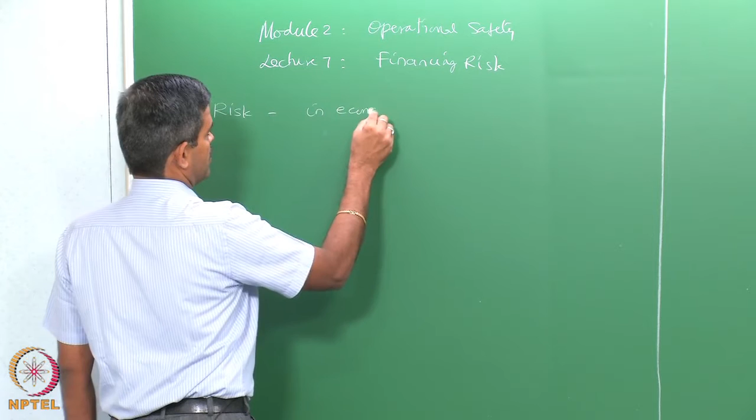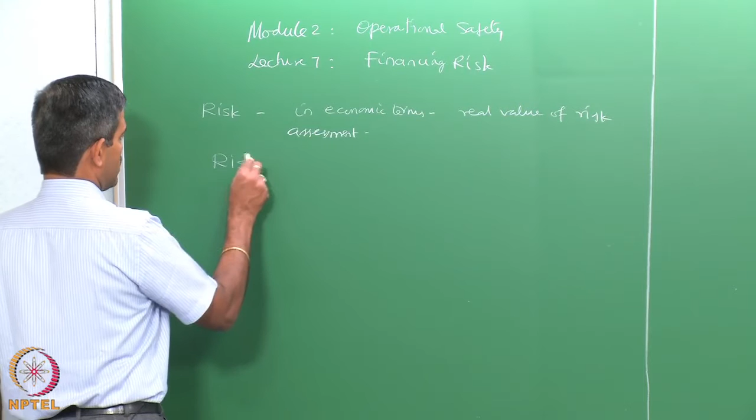Recollecting slightly from previous lectures: risk should be associated in economic terms to get the real meaning or value of risk. So, to get the real value of risk assessment, it is essential that risk be connected to economic terms. Therefore, it becomes important to quantify risk. So, risk need to be quantified.

One can use statistical tools to estimate probable risk analysis, but that is not effective because they do not address the economic issues behind the real value of risk assessment. So risk needs to be quantified. We agree that risk estimates are attractive

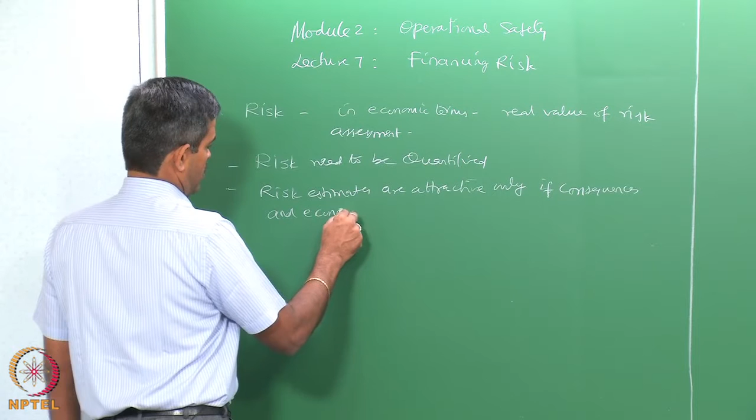only if consequences and economic perspective are also addressed in the analysis. So we can make a statement like this to make risk analysis or risk estimates more attractive.

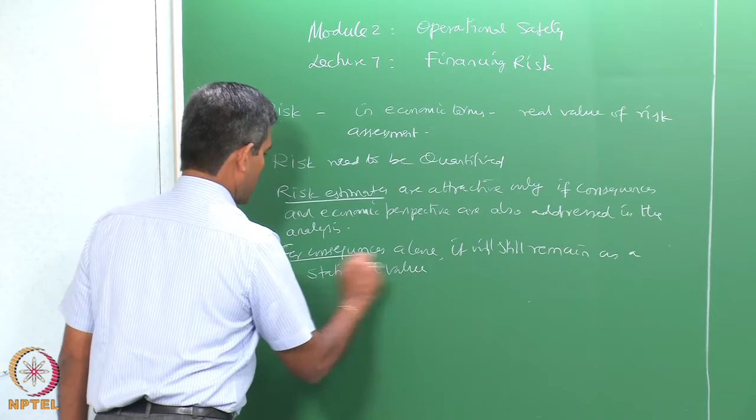But if you look at the consequences alone, you can understand that it will still remain as a statistical number. We will not be able to get back the original value of risk assessment if we do not attach economic consequences or economic importance to the risk analysis.

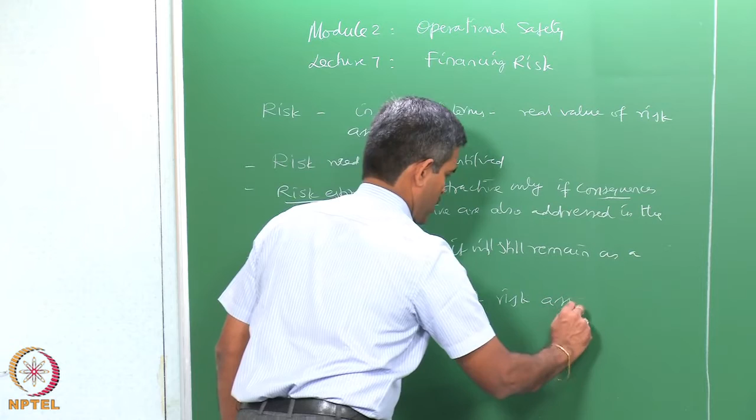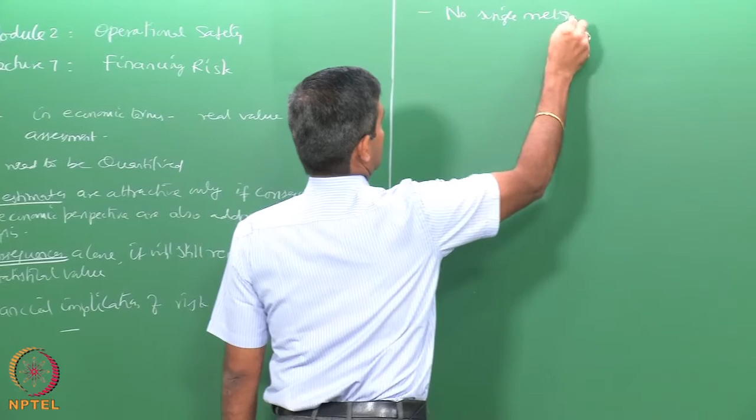So one is now interested to know what methods can address economic loss or estimate the loss - one is interested in the financial implication of risk assessment, because it should be reflected in the company's balance sheet for risk estimates and so on. Having said this, one can clearly criticize that there is no single method

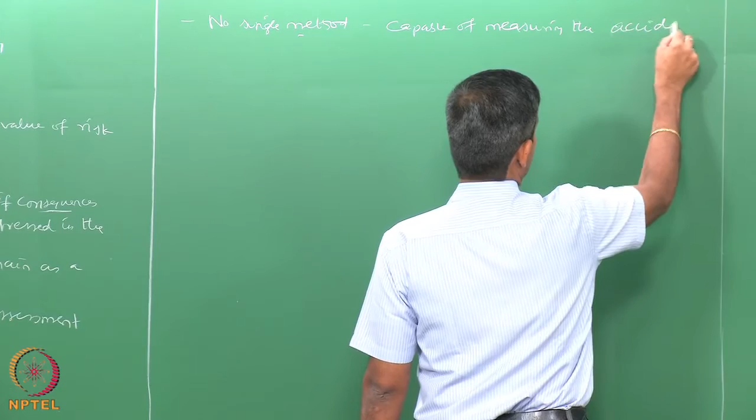which is capable of measuring the accident and loss statistics together.

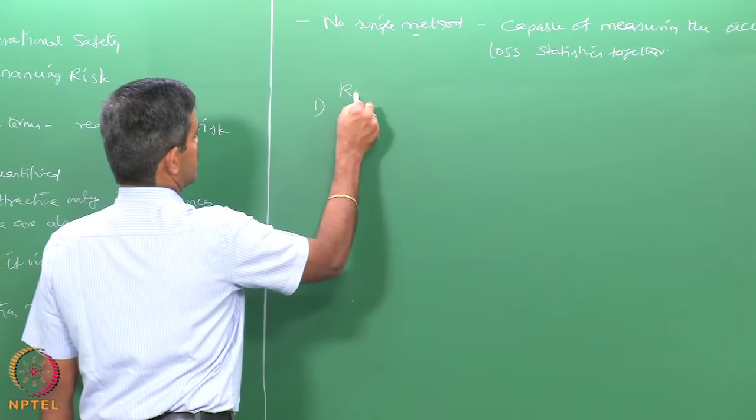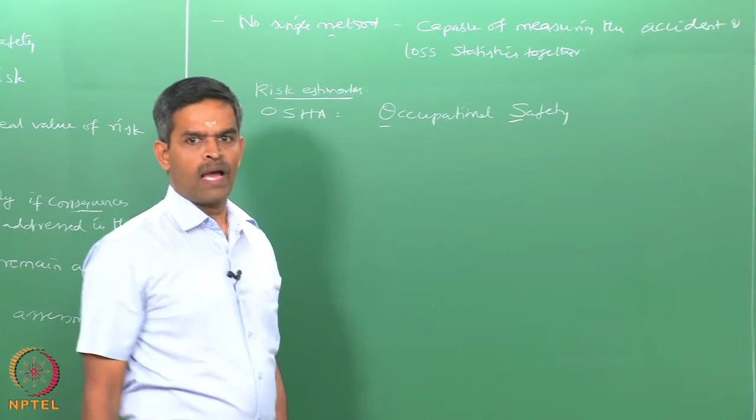Essentially, in the literature, there are three commonly referred methods used for risk estimates, suggested by three different agencies. One is OSHA, which we call Occupational Safety and Health Administration, under the US Department of Labor. They also suggest methods for risk estimates.

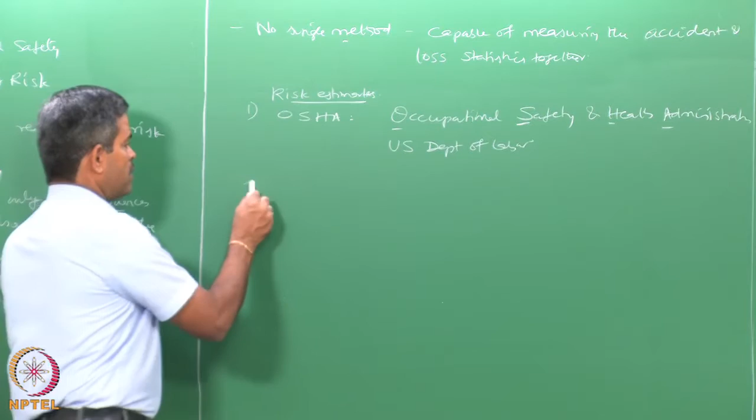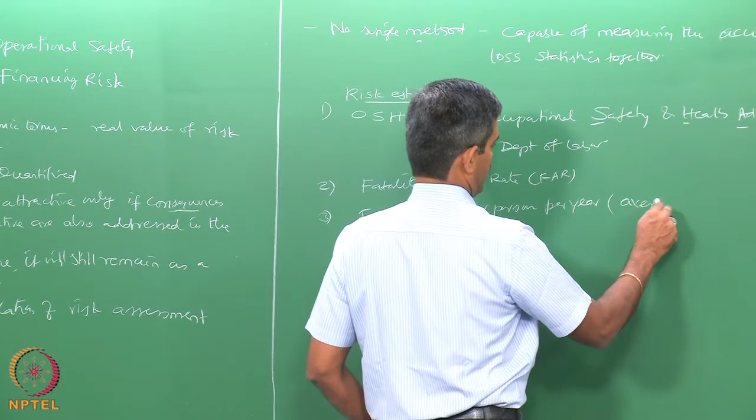The other method, as we saw briefly in the previous lecture, is the fatality accident rate, which is also used to measure risk. The third could be fatality rate per person per year. This is basically an average value. All the above methods report the number of accidents and/or fatalities for a fixed number of working hours.

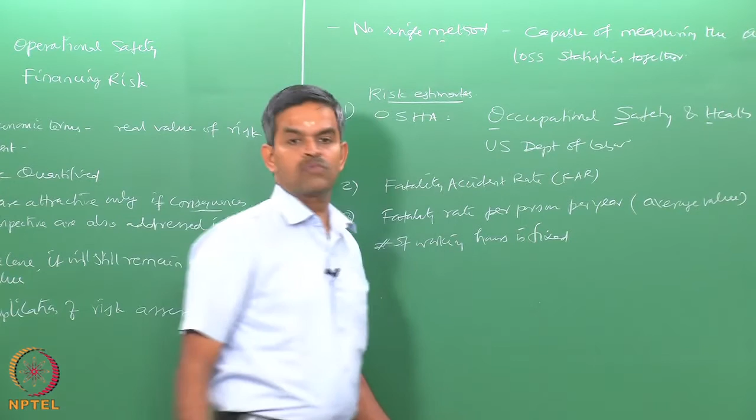That is very, very important. So in all three methods, the number of working hours is fixed. Depending upon the number of working hours a person is exposed, that is what the denominator means - the number of working hours during a specific period, which is unique and common to all the methods.

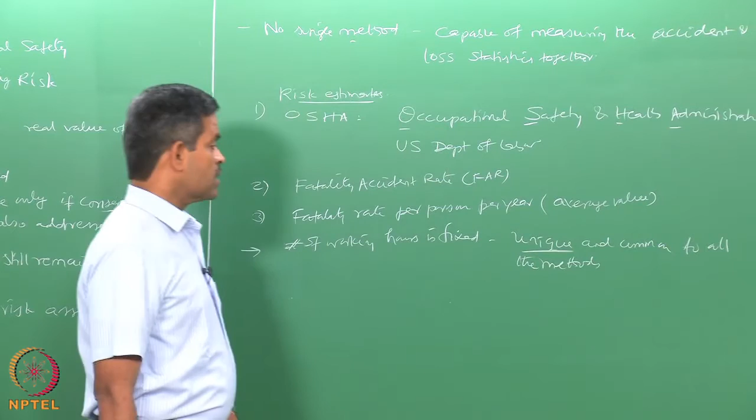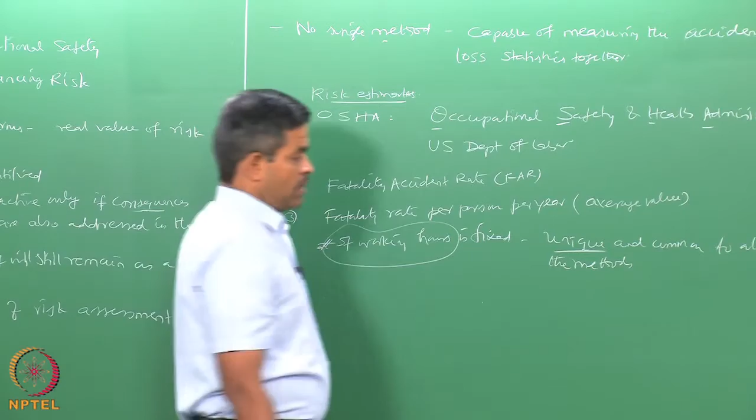Unique in the sense that risk analysis in offshore and oil and gas industries uses this specific approach where the number of working hours during which a person is exposed is fixed, maybe 8 hours, 6 hours, depending on the standards. This uniqueness remains common in all three methods suggested by international regulatory authorities, as seen from Srinivasan Chandrasekaran 2015.

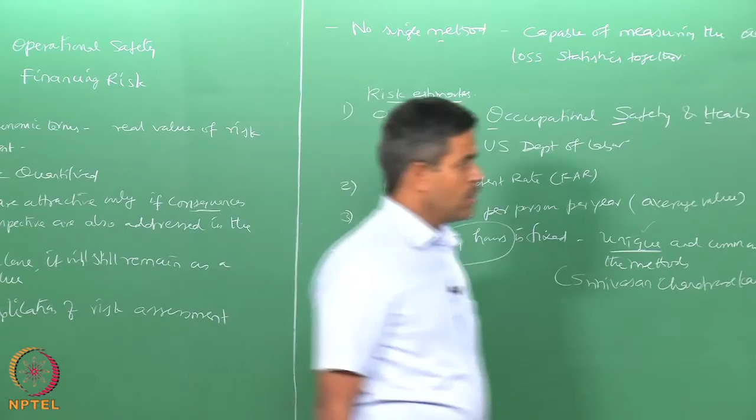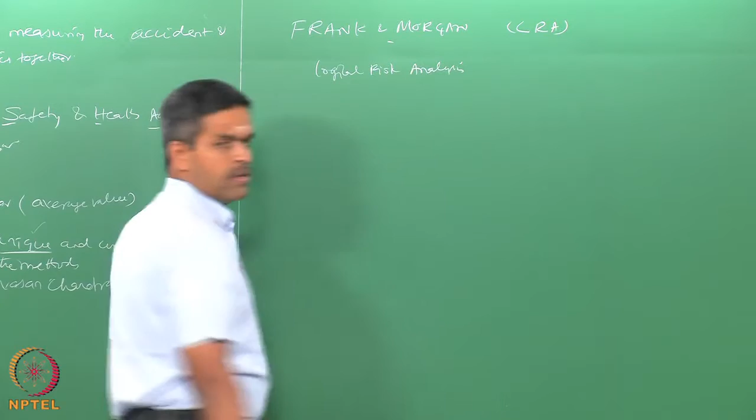Now we are heading towards understanding risk in terms of economic perspective. Frank and Morgan gave a method called LRA, that is called Logical Risk Analysis, suggested by Frank and Morgan in the year 1979.

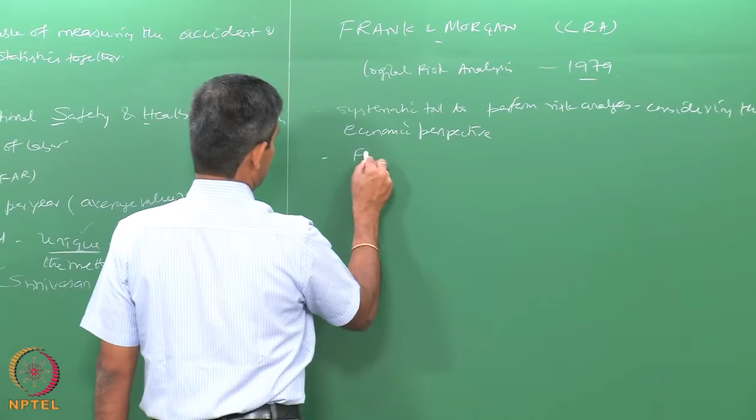This is a systematic tool to perform risk analysis considering the economic perspective. Ultimately, one can look at a term called financing risk, as addressed and stated by Frank and Morgan in the original paper.

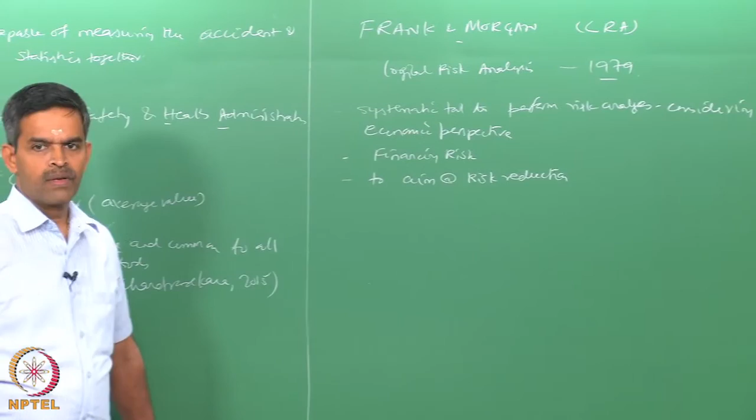The objective of the scheme is risk reduction - that is the objective of the whole exercise. Interestingly, Frank and Morgan advise this model to be applicable to any process industry, therefore the oil and gas industry can very well be an applicant of this particular method.

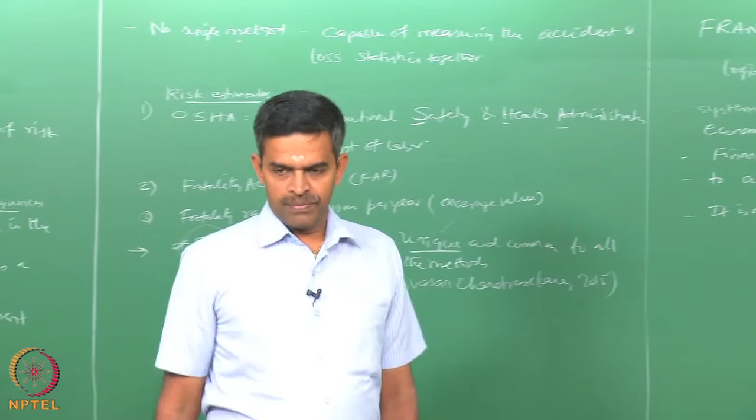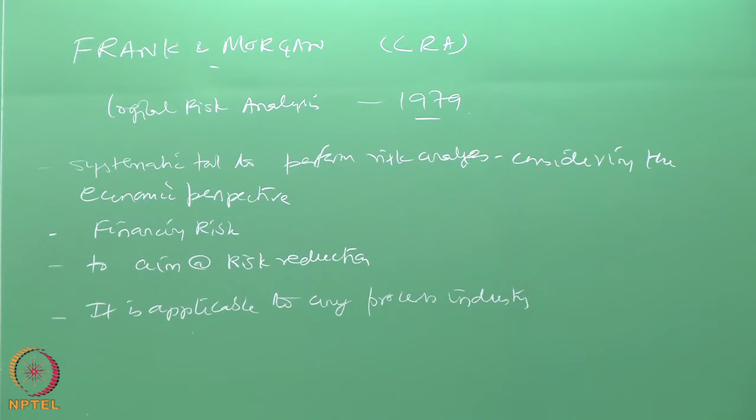Now, before applying this method for an example problem targeting risk reduction, let us try to understand certain basic things in the administrative perspective of the whole problem. For example, I am interested in aiming at the risk reduction of the entire plant, so I am going to apply this method or model for a process plant.

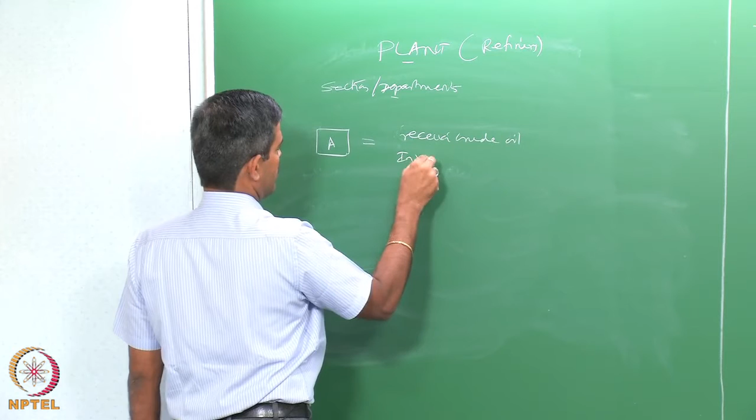The process plant may be a refinery, on the downstream side, refining crude oil. The plant has various sections, which we can also call departments. Let us say department A, assigned with receiving crude oil, so inventory, stores, etc. Department B can be the processing sector,

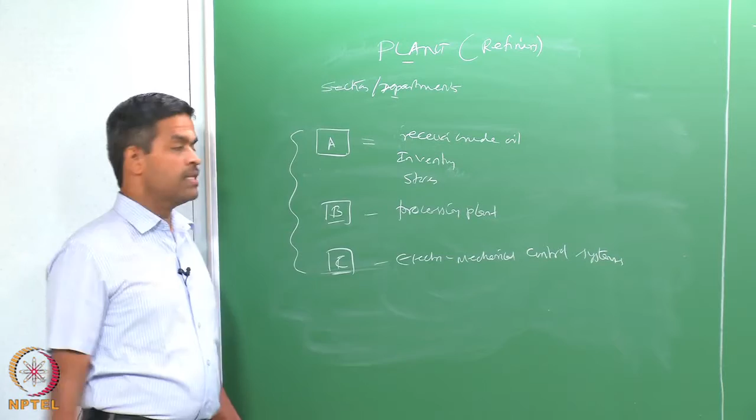Department C could be the electromechanical control systems, etc. So one can divide the plant into n number of departments, separated depending on their functional application related to the specific plant. This is very easy and very simple - this is how every industry actually works.

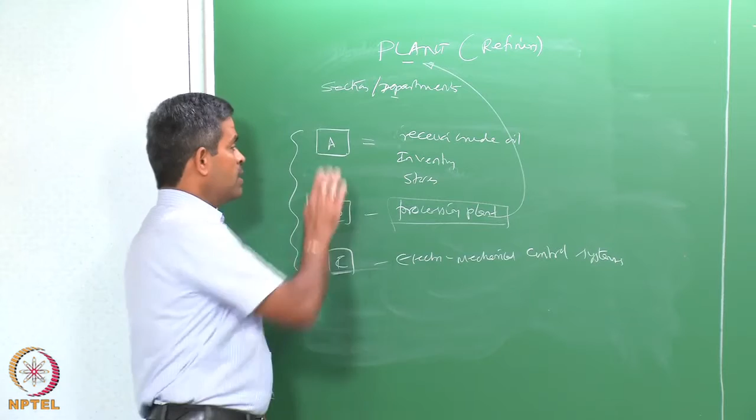We need not separate them - they are already separately located, isolated, interconnected by pipelines or flow charts, etc. So there are interconnections between them. However, each one of them is also capable of operating independently. Let us have a plant where such logistical arrangements exist. The Frank-Morgan method has actually 6 steps to compute risk analysis.

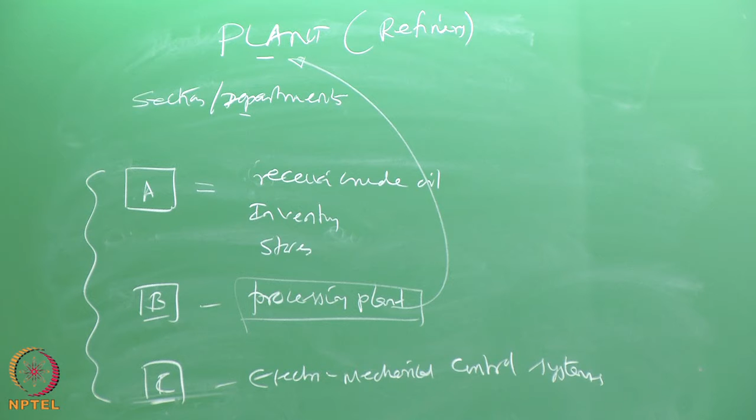So, there are 6 steps to compute risk analysis or to perform risk analysis of a given process department.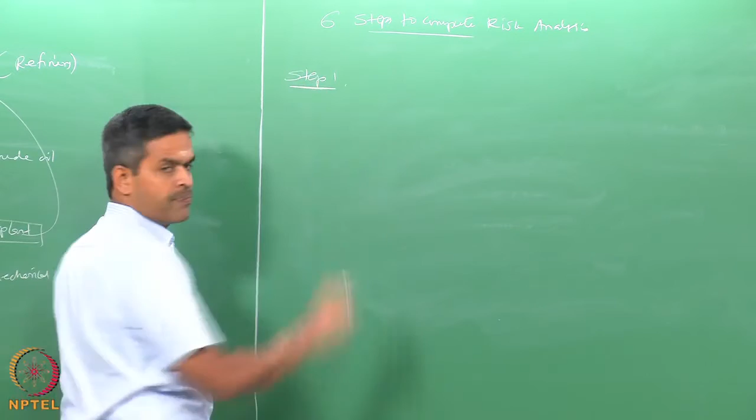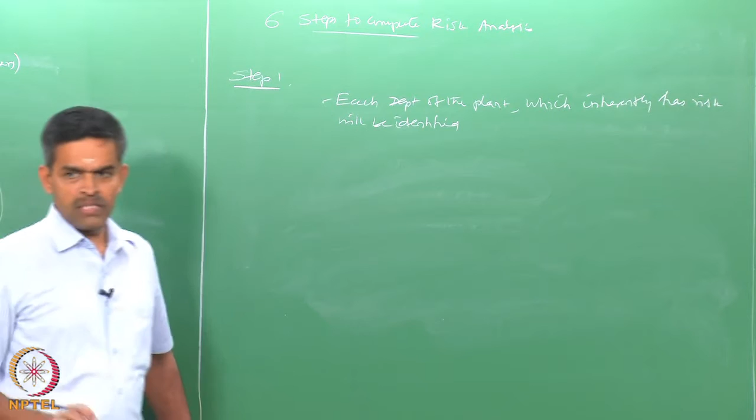In step number 1, what we actually do is each department of the plant or the industry which inherently has risk will be identified. What does it mean is each department will have inherently some risk present. The hazard scenario would be there. So people should identify the hazard scenario and try to look at the probability of the hazard scenario getting ripened or matured to become a risk which is non-acceptable as per the standards of safety of the company. So each department will be associated with a specific risk which needs to be first identified.

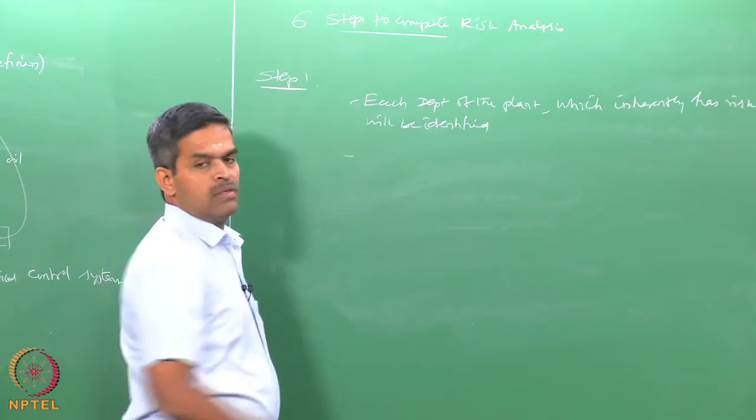So, to do this you need to identify the hazards present in the department, and the control measures the department follows.

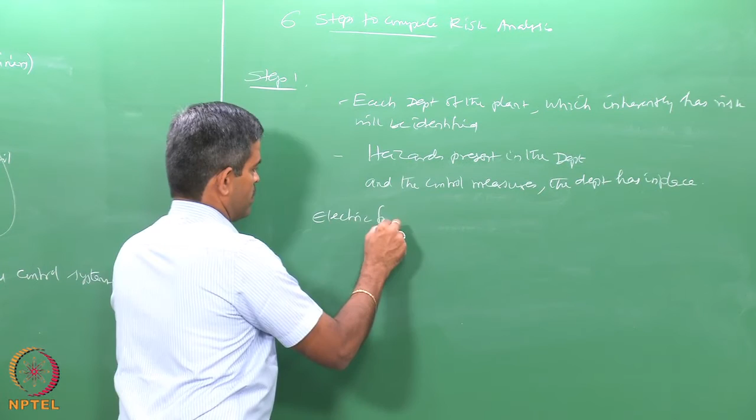I can give a simple example. Let us say there can be a possibility of electric fire, which is a hazard. However, there are fire alarms, fire sensors, fire sprinklers, etc. located in the department which can all be counted as control measures. So in every department you can easily identify various hazards present and the control measures available to counteract these hazards before they get matured to become a risk.

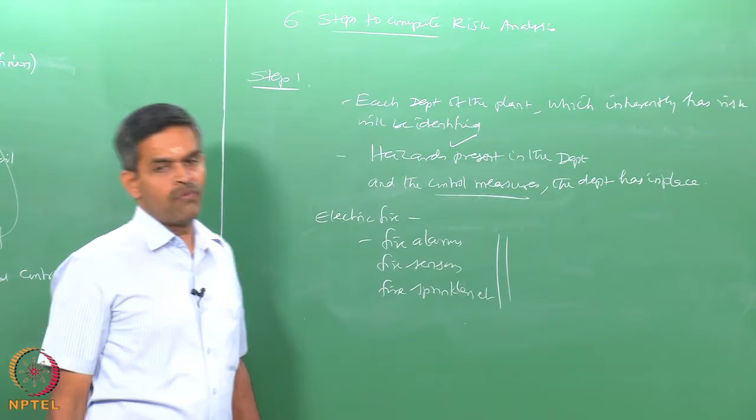Now, the question is, if you do not have any pre-idea, that is experience, about identifying a hazard and the corresponding control measure, because I have to convert both of them into equivalent quantitative numbers mathematically. So I have no clue, let us say I have no experience, I have not visited the department earlier, how do I go about it?

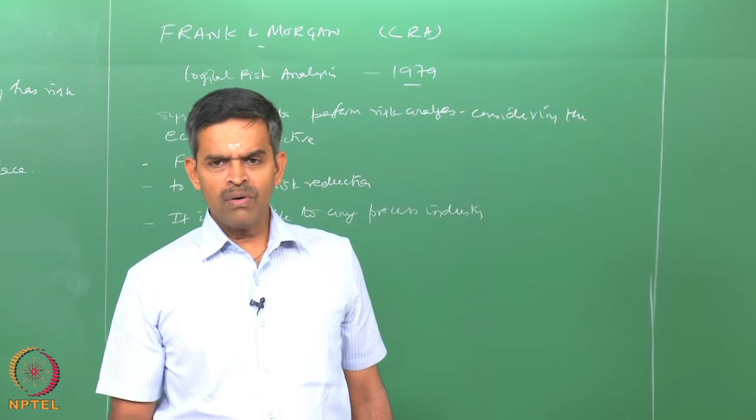So this is suggested by Frank and Morgan as a suggestive tool. However, one can also prepare this table on his own experience or based on the inventory and expertise people have in their own industry. So this table can also be prepared by you by conducting periodic inspection, gaining experience, or including experienced professionals in the team, and one can prepare this, what we call hazard grouping and hazard score.

If a few of them are present, you can sum them up. Let us say you have large inventory present, you have systems open routinely allowing flammable air mixture, and you also have flammables with low flash point present in your inventory. In that case, your hazard score for this group could be 1 plus 2, plus 2, so 5. So against a score of 10 you can assign a score of 5 as the hazard score for this particular group. Similarly, one can see the remaining groups.

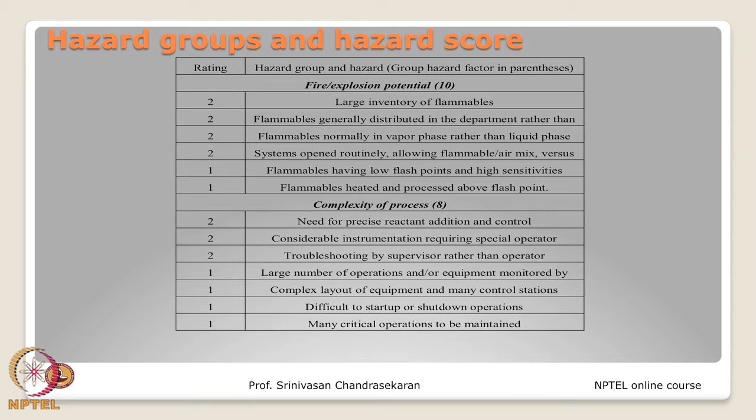So for each group we can calculate the hazard score, then add all the hazard scores for the specific plant. So it is very easy, this hazard score can be assigned to each department.

Even though you do not have experience, you can use the table or chart given by Frank and Morgan directly. Or if you are an experienced person, you are always allowed to generate your own table and hazard scores depending upon your experience, expertise, and the case studies you have encountered in the recent past in the industry.

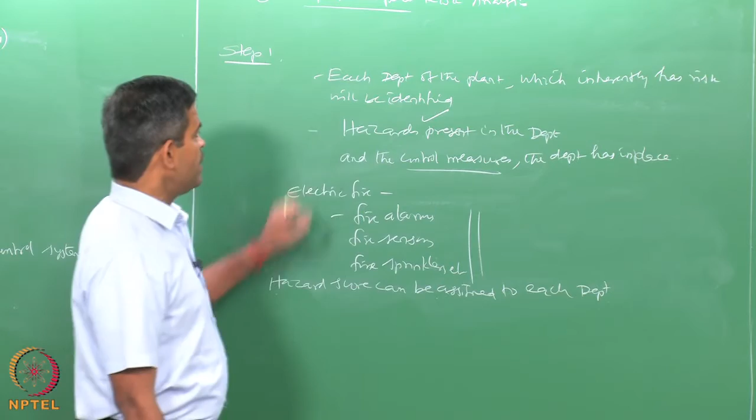So for every department, one can easily identify and assign a hazard score. You can group them, give each group a number, sum all of them, and give a single hazard score for all the groups present in the specific department. So you will do this for each department.

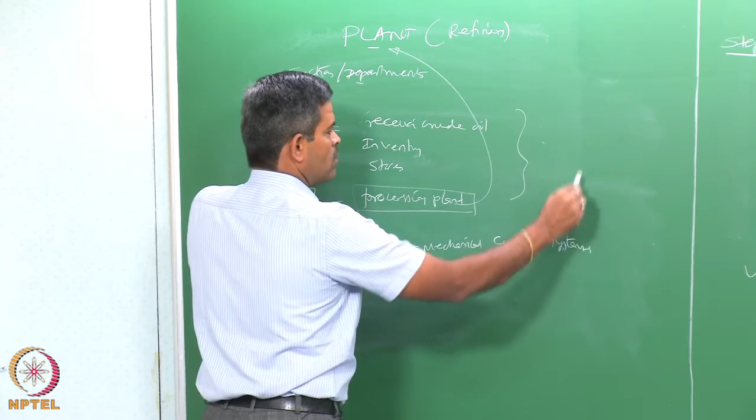For example, if your plant has three departments A, B, and C, for each department identify what hazard groups are present, what is the score for each group, and what is the total score. You can compute this and assign the hazard score to department A, and similarly and independently for department B and department C.

The next issue is about the control score. If you look at the screen now, you will see the remaining hazard groups like safety devices, inerting and dip piping, ventilation, and open construction.

Each one of these will have different subgroups present in them, and each subgroup will have a relevant and appropriate hazard score. You can identify the respective hazard scores for each group and sum them all together to get the hazard score of the department, as I just said.

Similarly, accessibility and separation—so all of them will have a specific hazard score.

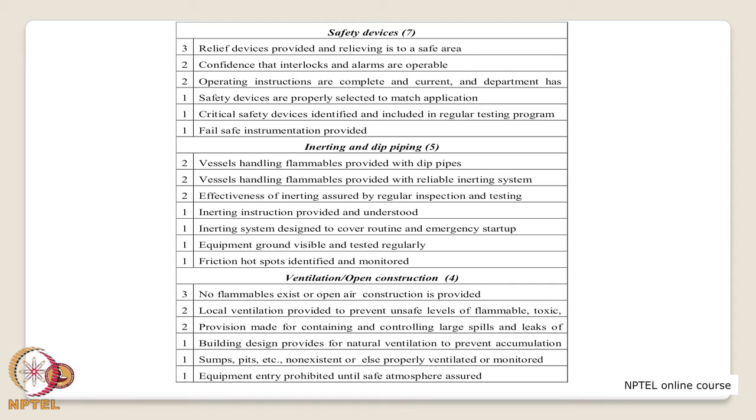The moment you assign a hazard score, depending upon the hazard level present in each department, you can always rank the department accordingly.

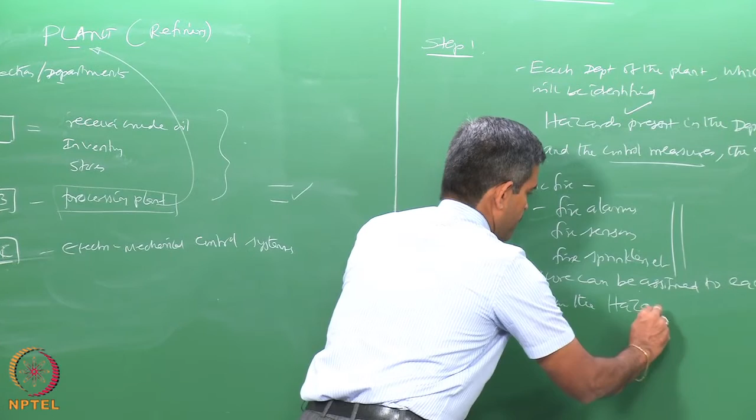You can rank the department also. It means the department which has the maximum hazardous score will always likely contribute to the risk of the entire plant in total.

So that department is at high risk, and you can rank the departments amongst A, B, and C.

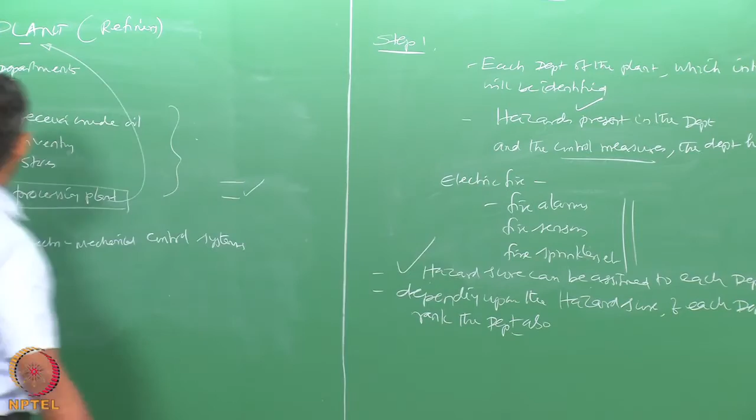If the hazard score of department A is higher than that of B and C, one can always say department A is at higher risk compared to B and C.

Because we assume that the hazard present in department A of the plant is likely to mature into becoming a risk.

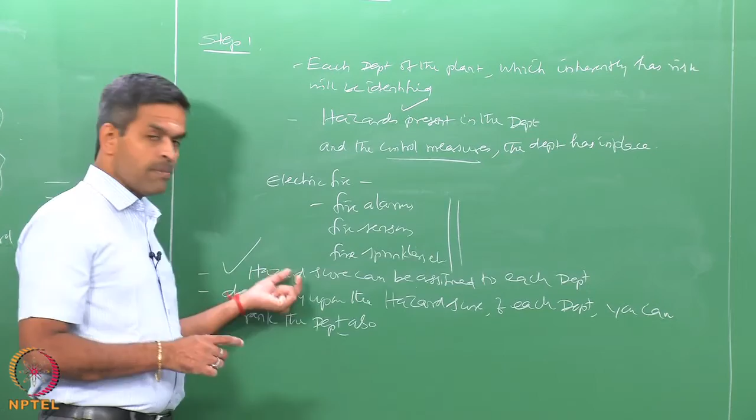This is what we call the first level of risk assessment.

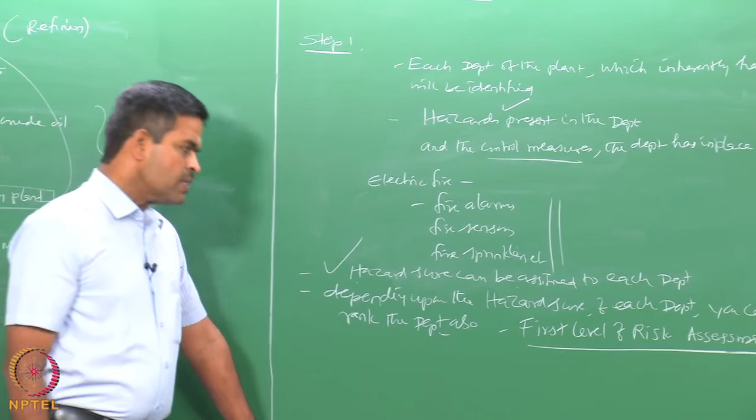Interestingly, in the first level of risk assessment itself, as suggested by Frank and Morgan, one can see the inventory, machinery and equipment, people involved, type of operation, and electrical and chemical processes involved—all are accounted for in looking at the hazard contributed from each group.

So friends, it is not only about accounting for the people working or getting exposed to the risk or hazard situation, it also includes the value of the whole process line in terms of equipment, etc.

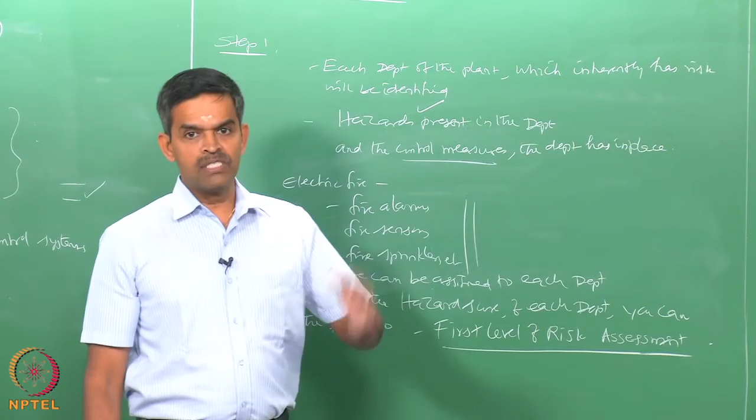So hazard scores are associated depending upon the commercial value of the whole process, which is indirectly accounted for in terms of hazard score. Therefore, that hazard score will always rank the department depending upon which department gets the maximum hazard score first.

So one actually needs a checklist to prepare a hazard score. I showed a checklist suggested by Frank and Morgan, based on which your hazard scores can be prepared.

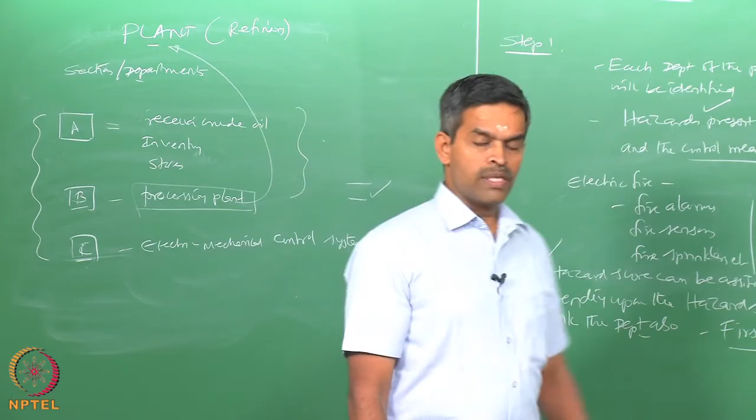One can also prepare a checklist on their own, so that you can assign hazard scores depending upon the type of operation practiced in the specific department. The score can also be associated in terms of numbers related to the economic importance of the specific department and the specific subgroup within the group of the department.

So you can always account indirectly for the economic perspective even at the hazard assessment level itself, which we call the first level of risk assessment.

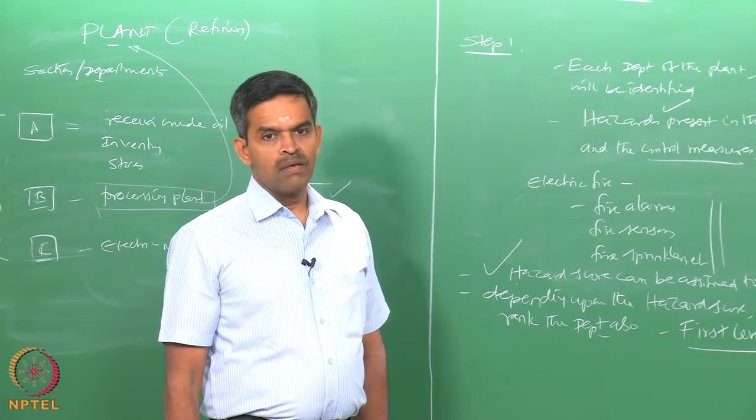As I said, risk will always be a matured outcome of a hazard. This will always happen only when the control measures present in the department are not effective.

So to understand whether the hazard situation present in the department will materialize into a risk, one should also look at the control measures the department has built into its design, to see if it can control the hazard situation or not.

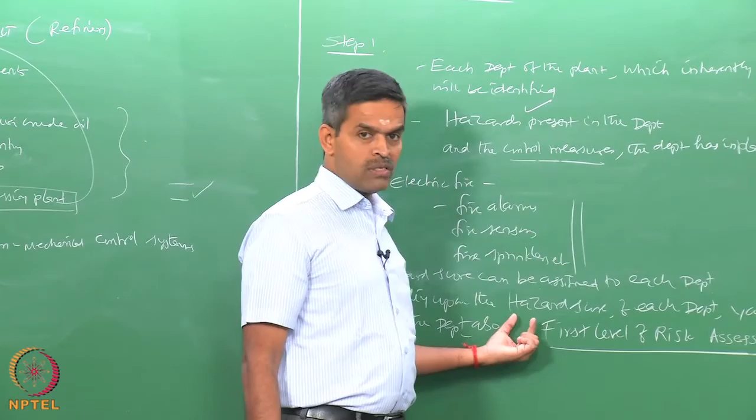So one should look for control scores of each department. To maintain the control scores, again you need to have a checklist.

Control scores need to be computed for each department.

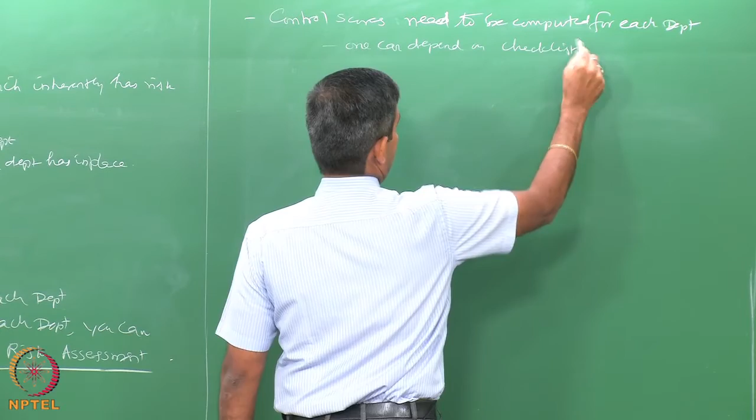So obviously, one can depend on a checklist, either one you have or by referring to Frank and Morgan.

Frank and Morgan also give different control scores for each department or each process.

So depending upon the method by which you prepare the hazard score, similarly one can prepare the control scores also.

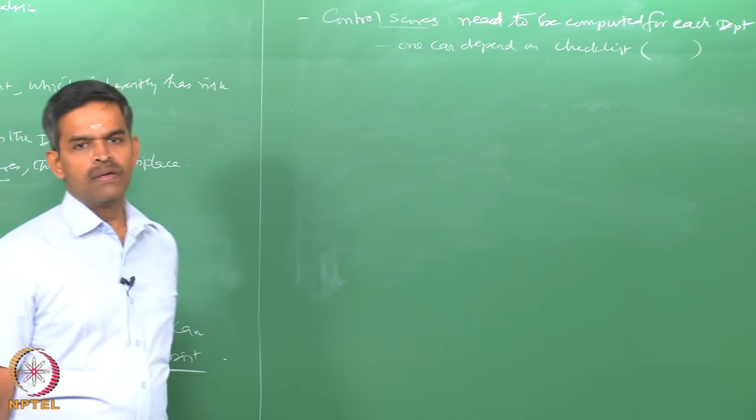So now for each department, one has calculated the hazard score.

And the control score. For understanding, let us say the hazard score is nothing but the sum of the hazard weightage.

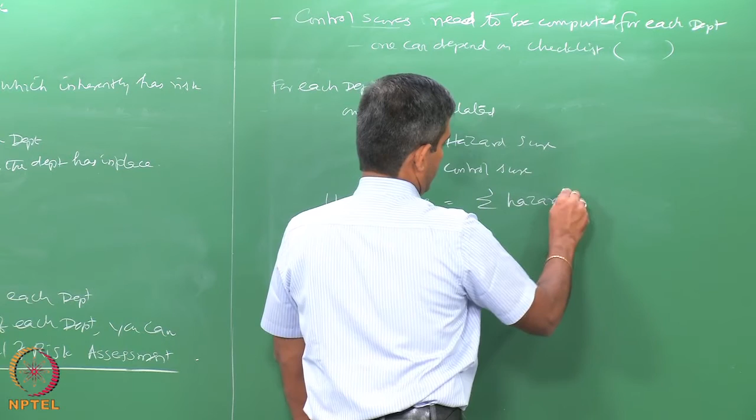Of each subgroup within a group for each department. So the hazard score is prepared for each department.

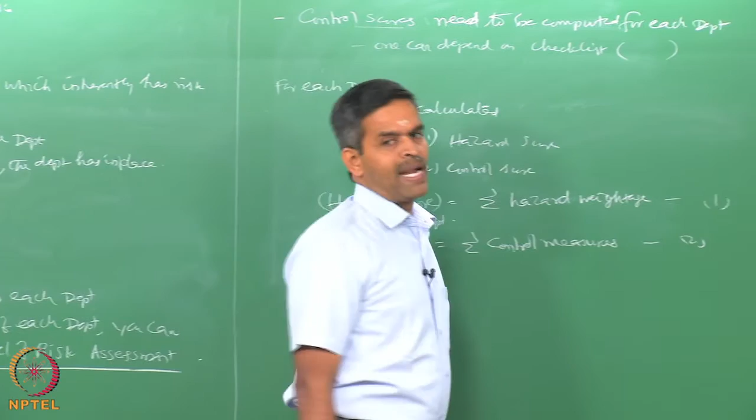Similarly, control score is also a sum of control measures present in each department. For example, let us look into various control measures a department or a plant can have. The plant can have a siren system, an automatic shutdown system of the process line, smoke detectors, and automatic sprinkler systems. All these control measures independently evaluated will have weightage, and you can add all of them to say the control score of my department is so and so.

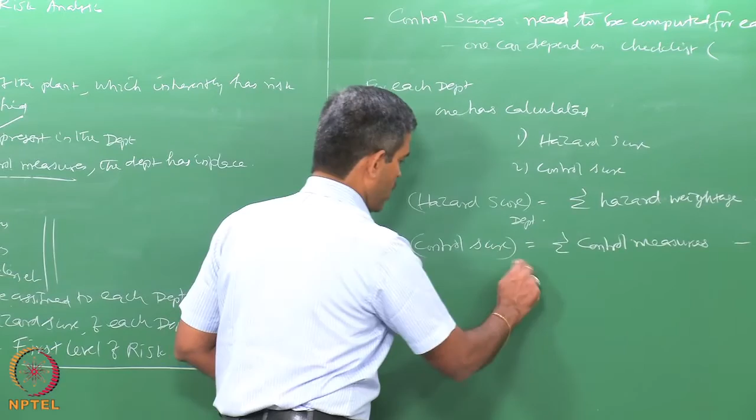So you have a control score in terms of a number, you also have a hazard score in terms of a number. Both are numeric values. Now, after determining the hazard score and control score of each department, risk index can be calculated.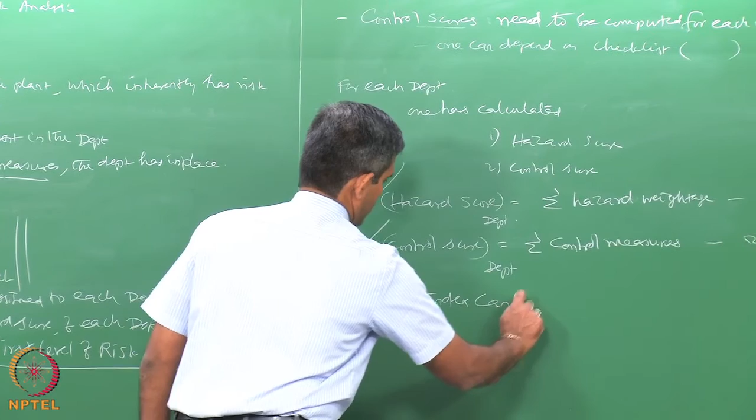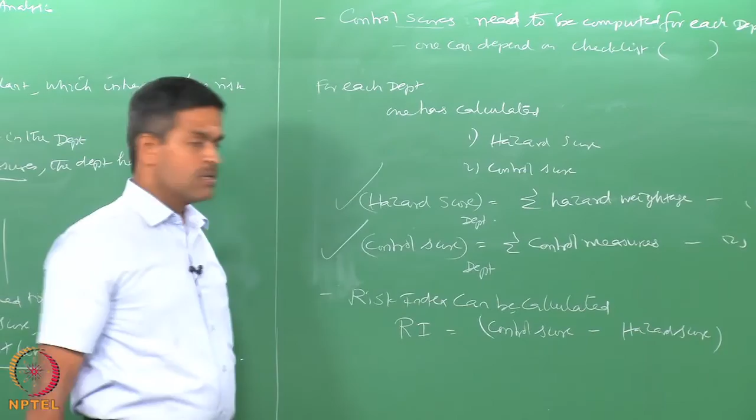Risk index, given by RI, is nothing but the control score minus the hazard score. Ladies and gentlemen, please pay attention to this equation: risk index is not the difference between control score and hazard score, it is always control score minus hazard score.

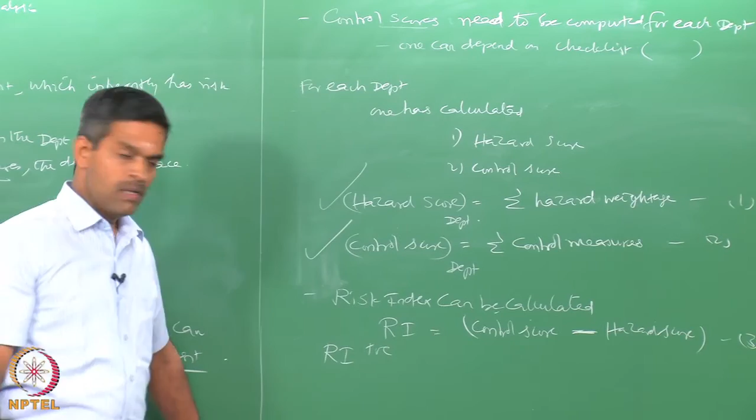It means risk index can be positive if the control measures are far better compared to the hazard scenario present in the department. Risk index can be negative, indicating that the control measures present in the department are very inferior compared to the hazard scenario identified for the department. Risk index can also be numerically zero, meaning the control score numerically is exactly equal to the hazard score.

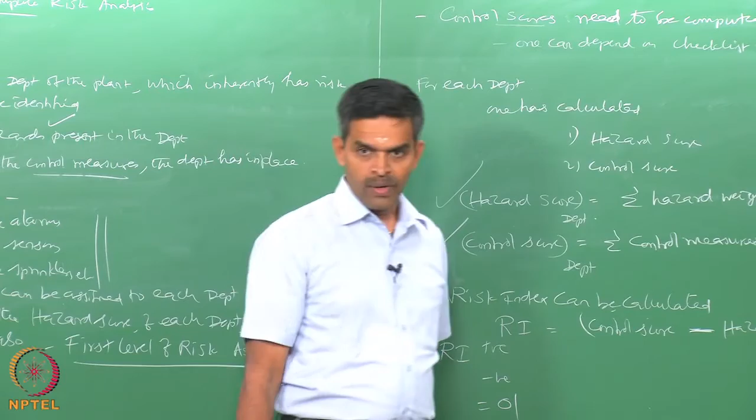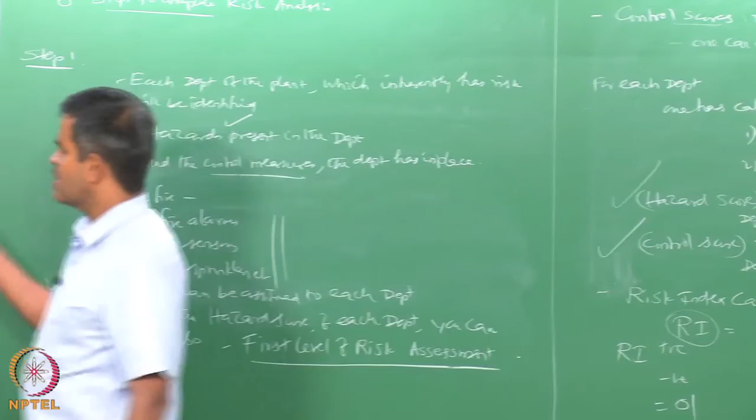So this risk index will always indicate which department has poor control measures, whereas the first level of risk assessment indicated which department has the highest hazard present in the whole plant. So now you are gradually converging towards a statement concluding, amongst the 7 or 8 or 3 or 4 departments present in a given process plant, which department within the plant initiates risk.

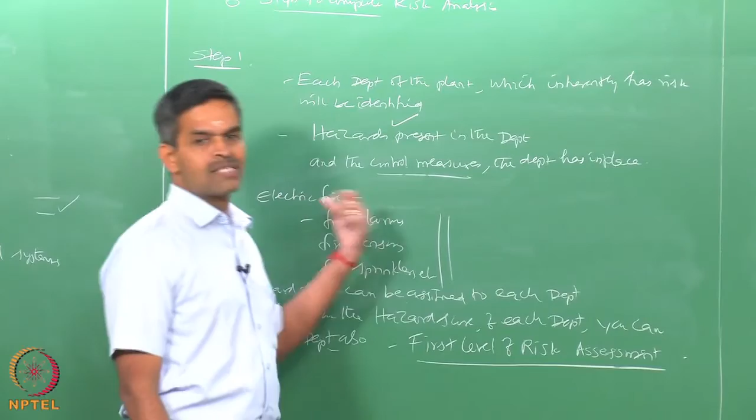Which department within the plant can initiate risk, which department has more likelihood of initiating risk, which department actually initiates or is capable of initiating risk. The risk index and first level of risk assessment, or the hazard score, will be able to clearly tell you in mathematical terms which department is to be focused towards safety assurance.

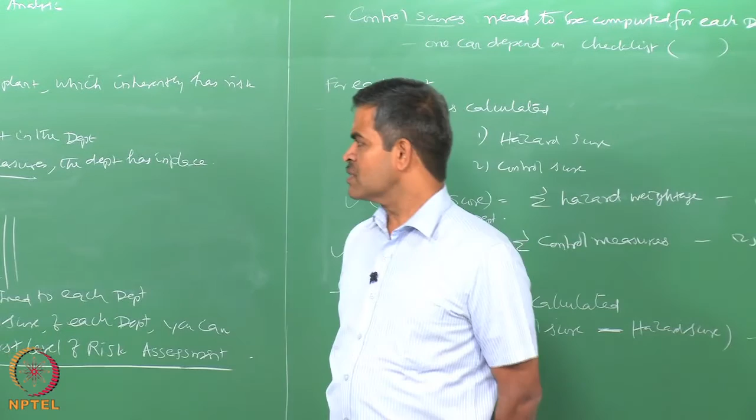So friends, it is a very interesting and elaborate method which can be applied to any process industry. Now the catch in this whole discussion, in step 1, is that the risk index and risk assessment at the first level all depend on what we call the inspection or routine table. So we need to conduct detailed inspections based on the experience and expertise of various people working in different departments, and prepare this table as suggested by Frank and Morgan.

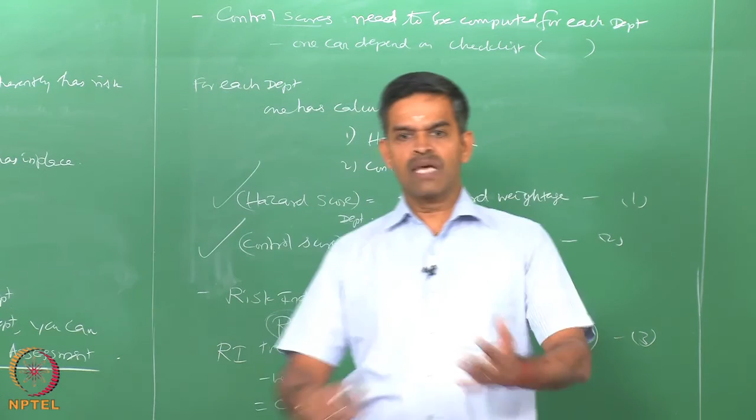So you have got to group the hazard situations present in any process plant depending upon previous years' accidents, assign a score to each one of the possible hazard scenarios, make a total score, subdivide them into different groups, and keep it ready. This can be as elaborate and as detailed as per your choice.

So your first job as a risk assessor or an offshore engineer is to make a site inspection to any process plant, note down the various hazardous scenarios present in the plant, group them, subgroup them, give a number to them and prepare an elaborate list. Discuss and deliberate with the employees and employer, try to freeze it out, and have a unique list with you, which itself is a very interesting and very Herculean task.

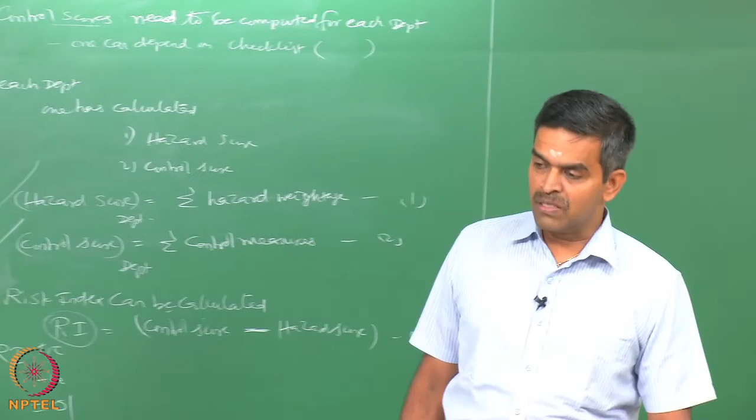Interestingly, every process industry does have such lists if they are serious enough to implement safety assurance in the whole process. So friends, in this lecture we discussed the risk assessment method. We started with Frank and Morgan's method of financing risk. We will continue with the same method in the next class and solve an example.

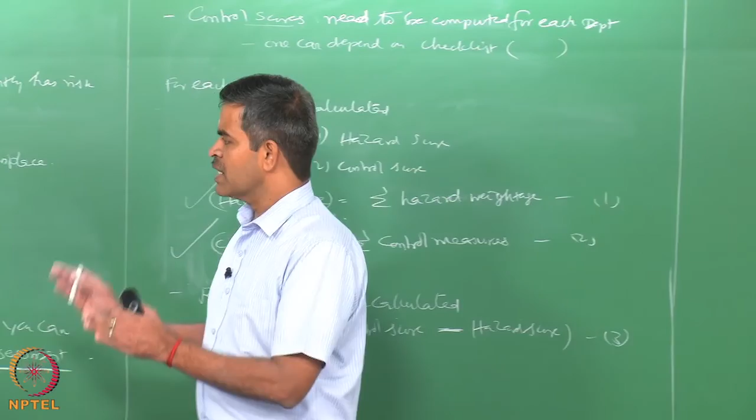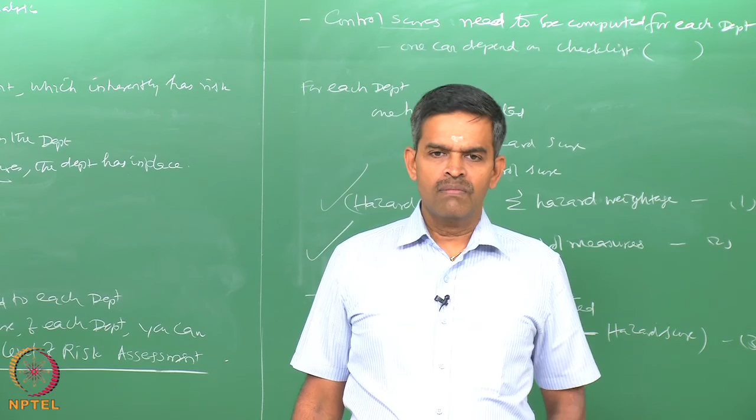So we have understood how risk is getting quantified in terms of hazard at the first level and in terms of risk at the second level, both occurring at the first step itself on the Frank and Morgan financing risk analysis or method. This is one of the interesting tools which can be easily applied to any process industry as suggested by Frank and Morgan, and this method has been available in the literature since the 80s.

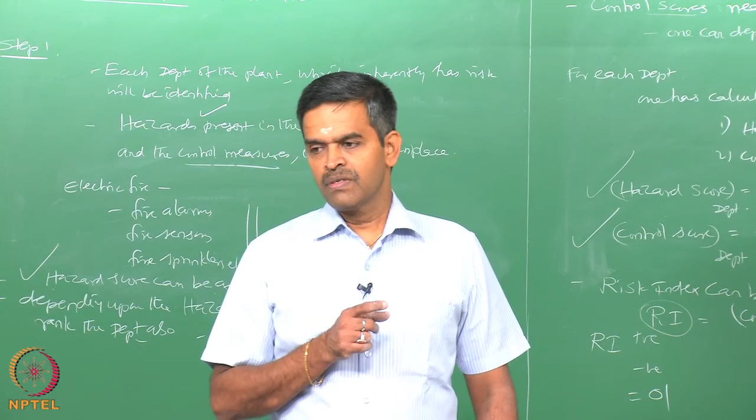So risk analysis, friends, is not yesterday's business. People have been sensitized with risk and hazard for the past 30-40 years. So accidents do happen, accidents happen, will happen, continue to happen even with all these methods, because accidents can only be prevented if safety and risk are realized and sensitized as an experience. So it is a culture. Safety is a culture, it is not a practice, not an education.

Okay, so we will discuss this method in detail in the next lecture as well. We will also solve an example, give you hands-on experience, diagnose the example very clearly, and show you how this method can be very easily useful and interestingly derivable and applicable to draw conclusions based on the scenario present within the department of a plant. Thank you very much.